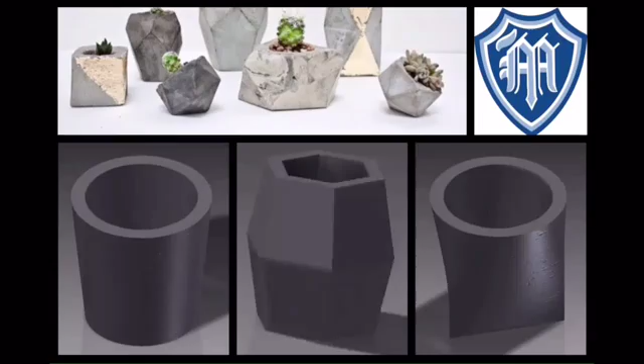If you've created a concrete pot using the Lofted tool as well as the shell, there's a slightly different process to create your inside moulds and outside moulds. To do this, go back to your original sketches that sit within your loft, and we're going to increase the size by 6mm, which is 3mm either side for the thickness of your mould.

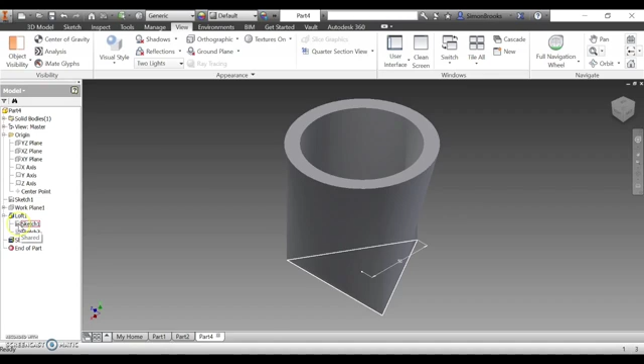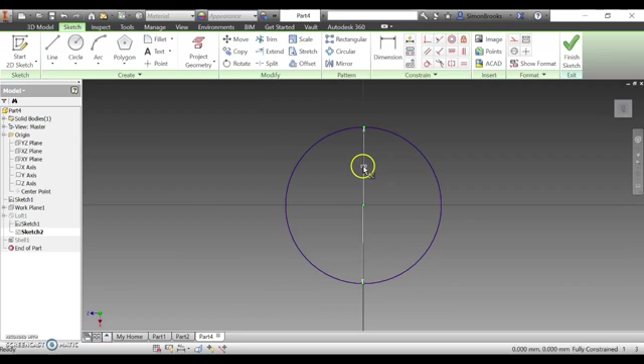First, double click on sketch 1, and instead of 50, change that to 56, then hit finish sketch. You'll see the triangle shapes change slightly. Same for sketch 2 - double click on that and change it to 106. Now our pot is actually a little bit bigger than our original plan.

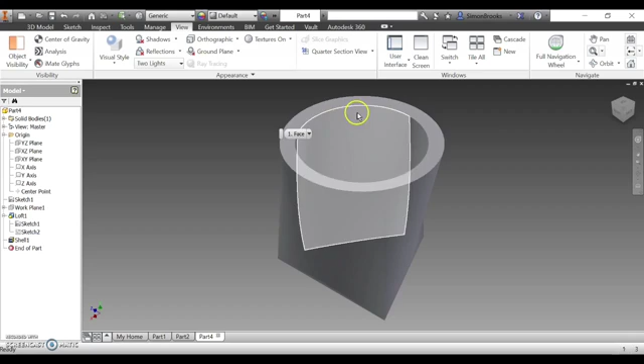Now we're going to change the shell's thickness. Rather than being the actual thickness for the pot, we're going to change that to the thickness of the outside mould. To do that, right click on the shell, go to edit feature, and change that thickness from 10 to 3. Once you're happy with that, hit OK. That's how we change the lofted design into the outside mould.

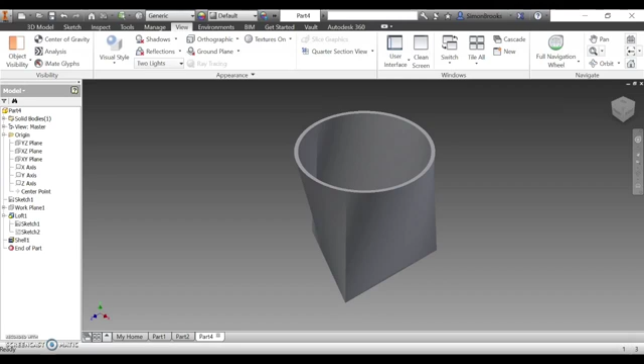Now that we've got the outside wall thickness correct for our outside mould, what we now need to do is create two parts to this mould so it is easily removed once the concrete is set.

What we also need to do first is to remove the bottom. The bottom that's sitting underneath is going to be sitting on a little bit of form ply, rather than the 3D printed bottom.

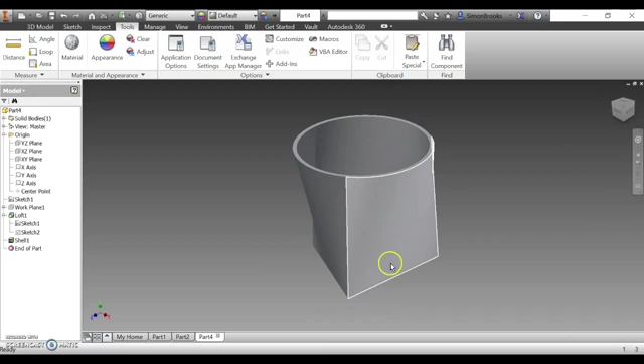What we need to do now is change the work plane distance. Rather than being 100, we're going to make it 103. To do that, we just edit the dimension and make that 103. The reason for the 3 is that it has a 3mm bottom on it. So we just do that - we'll slightly stretch our design.

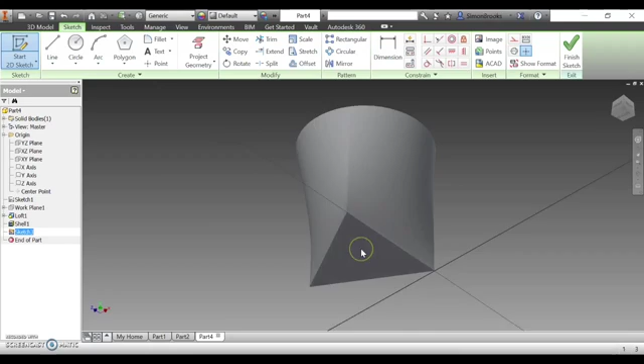Now what we need to do next is remove the bottom. Same as what we did in the other drawing, we create a 2D sketch and draw a circle over the top of it, just to clear the triangle, to make it quick and easy. As long as it's clearing the design, it doesn't need to be dimensioned. We hit finish sketch, and we're going to cut our circle away 3mm, so you can see the bottom is cut out just there.

Just to give you an example, if I went 2.5, you would see that the bottom is still solid at the bottom there. So just make it the size of your shell, which is 3mm in this example. Once happy with that, hit OK.

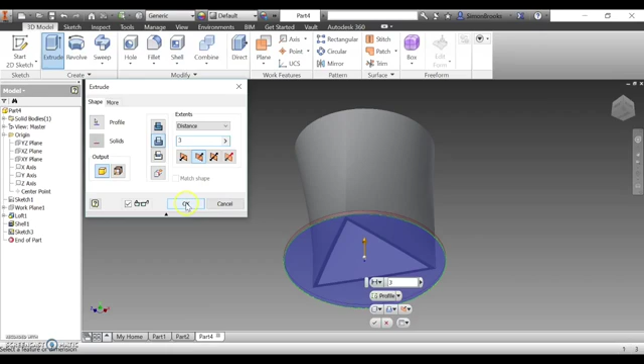Now we're back at the step where we did in the previous drawing, where we drew the circle on the top. You could do it on the bottom as well. Actually, in this case we will draw it on the bottom because we need to make sure that the line is going perpendicular to one of the edges, to make it easier for the mould to be removed.

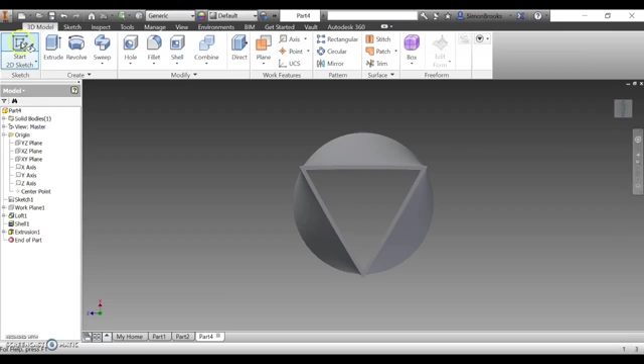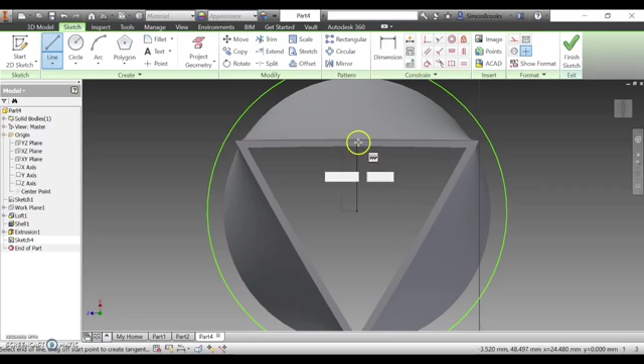So, 2D sketch on the bottom. We'll draw the circle again to make sure it clears the entire design, the entire outside mould. Here, we'll click on the origin or the center of our triangle and bring that straight through the design, making sure that it's at 0 degrees, so it's nice and straight.

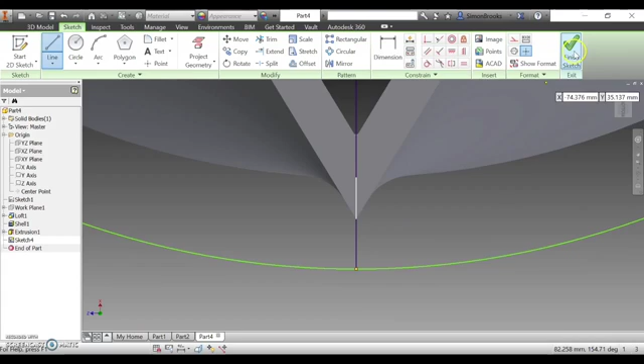It's going through our point just here - that's the critical point, going through that little shape. Once you're happy with that, we hit finish sketch, and using the same process, we extrude cut away one of those designs. Now if your design is symmetrical - this one isn't - so we'll have to make sure we do that on both sides and save a copy of both.

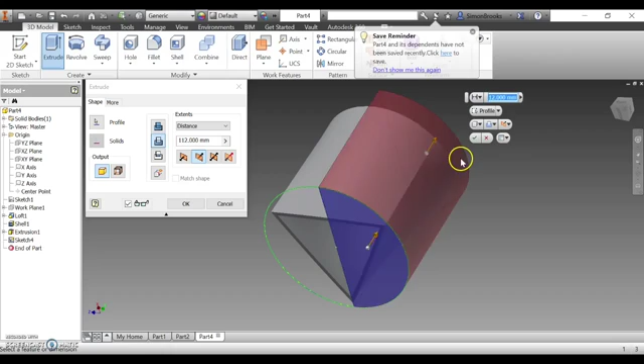We can just show you a shortcut for another way to do it - just drag that through - and that's how we create one part of our design, one part of our outside mould for this one. Once you're happy with that, save a copy and then repeat that on the other side.